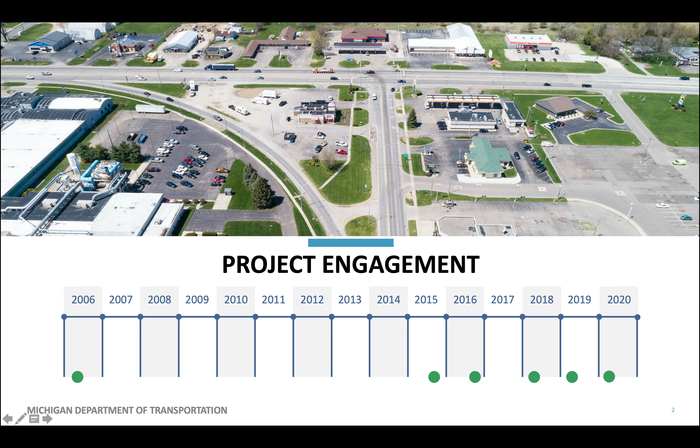An open house in 2016 resulted in some desired changes, and MDOT in 2018 presented a refined concept in another public meeting. MDOT broke ground on the 2-year project in 2019 and is expected to complete the major reconstruction in late 2020. The project area runs from the south junction with M60 to the Rocky River, which is just past Hoffman Road in the city of Three Rivers, and in Fabius Township in St. Joseph County. This is a large and complex project.

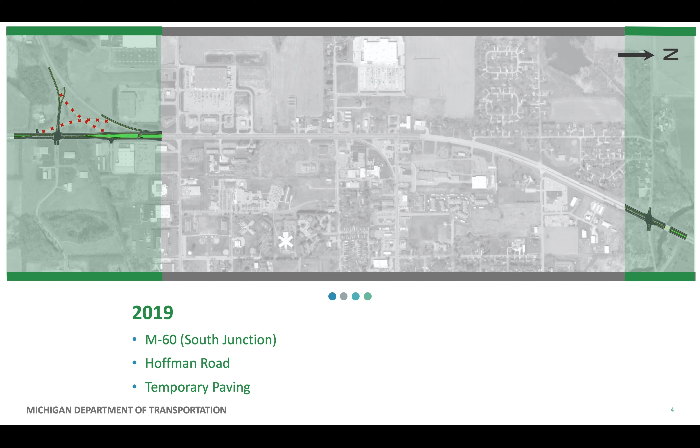In 2019, MDOT reconstructed the south interchange with M60, reconstructed the Hoffman Road intersection, repaired the Rocky River Bridge, and placed temporary pavement necessary for maintaining traffic through the 2020 construction. MDOT and Three Rivers also collaborated on operational improvements at the north junction of M60.

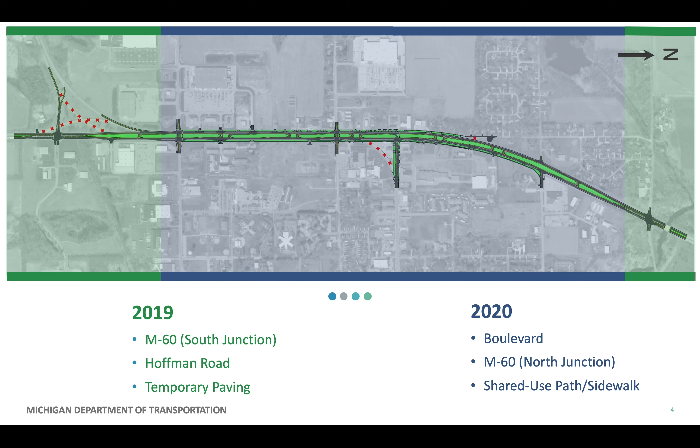In 2020, MDOT is reconstructing the remainder of the US-131 Boulevard and intersections, sidewalks, and a shared-use path. MDOT will be working on restoration and tree cultivation for an additional 2 years after the reconstruction is completed. The boulevard will separate northbound and southbound traffic with a grassy median. Instead of signalized intersections, several indirect left turns, or Michigan lefts, will improve safety and traffic flow.

Research has shown boulevards improve safety by reducing turn-related crashes by up to 30%, reducing rear-end crashes by 15%, and reducing pedestrian crashes by as much as 50%. When paired with indirect left turns, this transformation also will improve capacity by up to 50%, reducing wait times for turns, simplifying driver decisions, and improving the overall aesthetics of this major artery through the city.

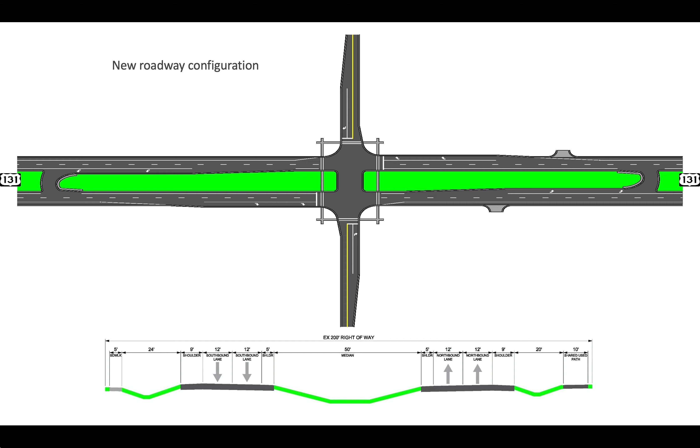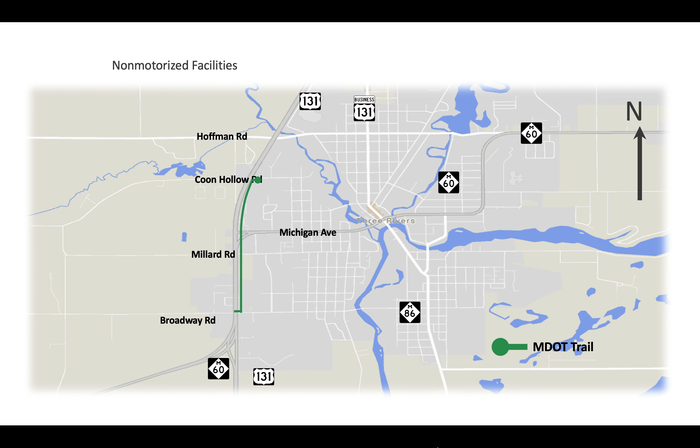The reconstruction project includes some pedestrian and non-motorized improvements too. MDOT is constructing a shared-use path on the east side of US-131 from Broadway to Arnold, and a sidewalk on the west side from Broadway to Kerr Creek. The city is constructing a shared-use path, which is shown here in red.

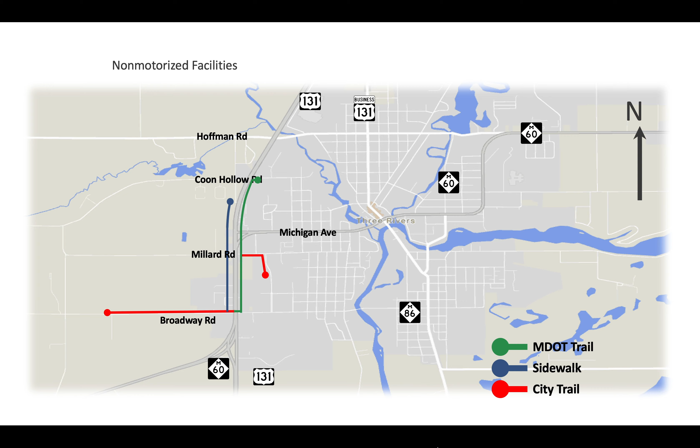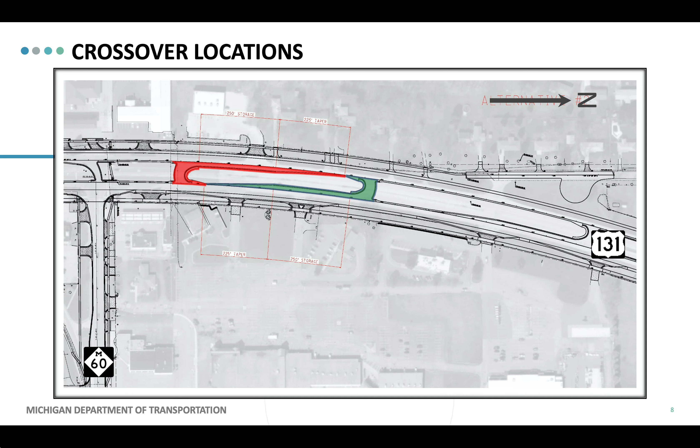The original plan for this area was to have the northbound to southbound US-131 crossover north of M60, pictured in green, followed by the southbound to northbound crossover, pictured in red. After talking with residents and business leaders, the locations of the crossovers were switched to allow southbound US-131 travelers to make a left turn prior to the M60 intersection.

Part of the reconstruction is to remove the northbound US-131 slip ramp to eastbound M60, and a right turn lane will be added at the intersection to improve safety. While the original plans called for only one lane for the eastbound M60 movement, coordination with the city resulted in adding a second lane to allow for better traffic movement and access to businesses.

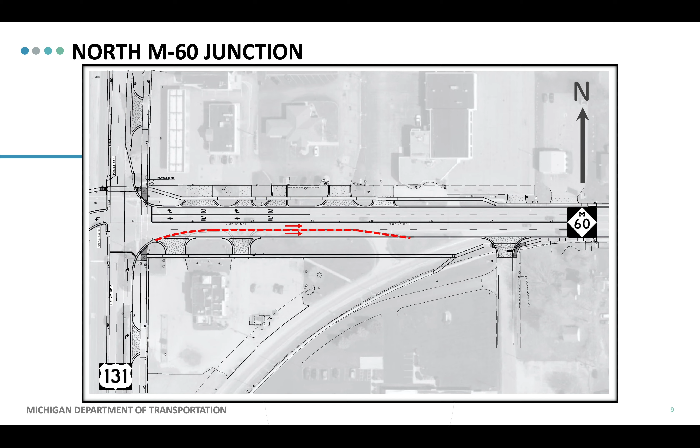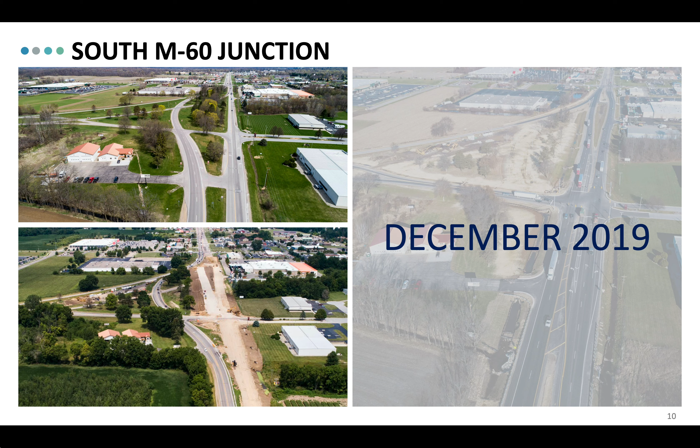One of the significant changes incorporated into the reconstruction is the new alignment of the intersection with M60 at the south end of the project. The new configuration improves safety by eliminating the ramps, so often a source of confusion and consternation. The work on US-131 by Hoffman Road was the other major area of work in 2019.

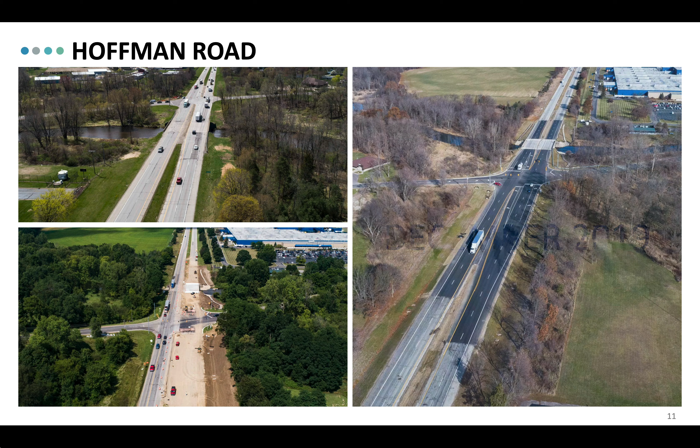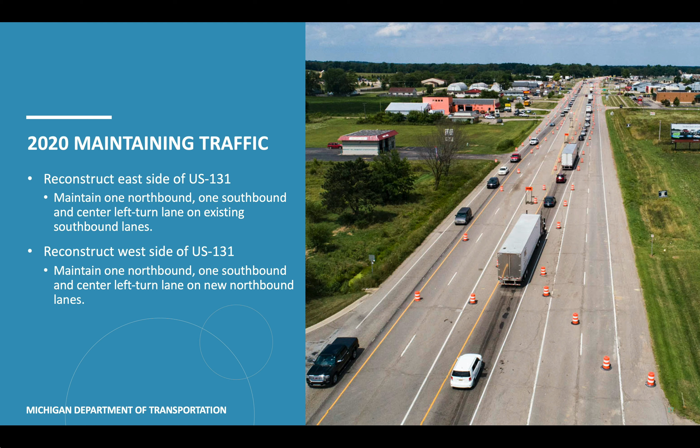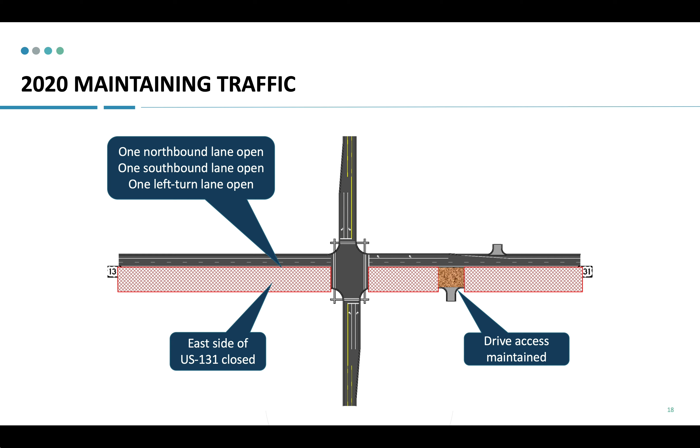In 2020, MDOT is reconstructing the majority of US-131 in Three Rivers. While the northbound lanes are being rebuilt, traffic will be maintained with the existing southbound lanes. Midway through the season, traffic will shift to the new northbound lanes while the southbound lanes are reconstructed. In each phase, MDOT will maintain one northbound lane, one southbound lane, and a center left turn lane. Access to businesses will be maintained throughout construction with gravel driveways across the lanes under construction.

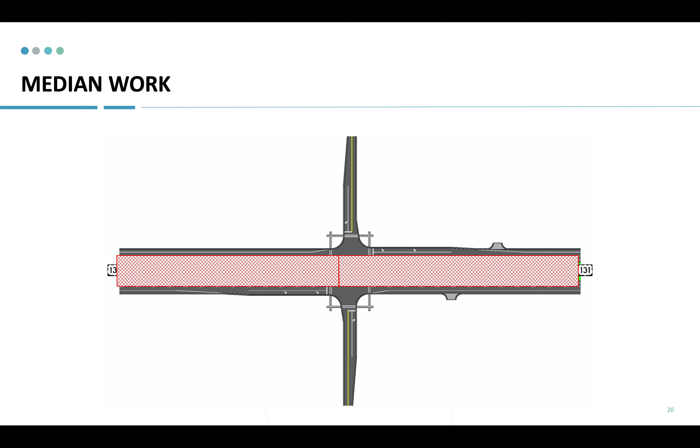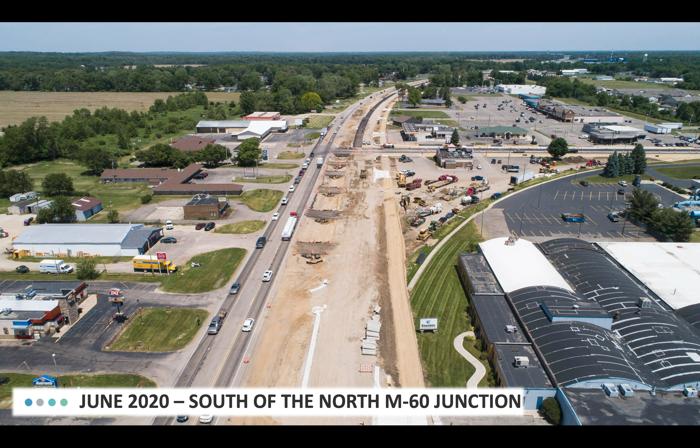The final phase will feature the construction of the median and Michigan left turns. There will be one northbound lane and one southbound lane open. There will only be 2 points at which motorists will be able to turn left before project completion. During this phase, northbound to southbound turns at Coon Hollow Road and southbound to northbound just south of West Broadway Street. Again, access to businesses will still be maintained.

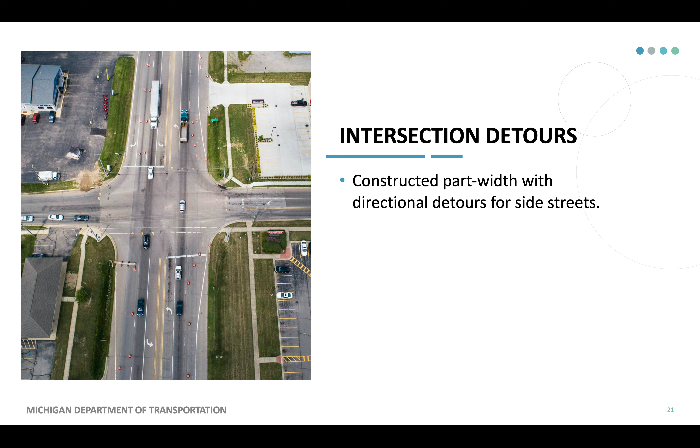Intersections will be reconstructed in phases to allow directional access to be maintained as regularly as possible. There will be some detours at these locations, and those routes will be posted. Reconstruction of the northbound lanes is expected to be completed in mid-July. Southbound US-131 is expected to be completed by mid-September, and the reconstruction of the median and left turns is scheduled for completion in November.